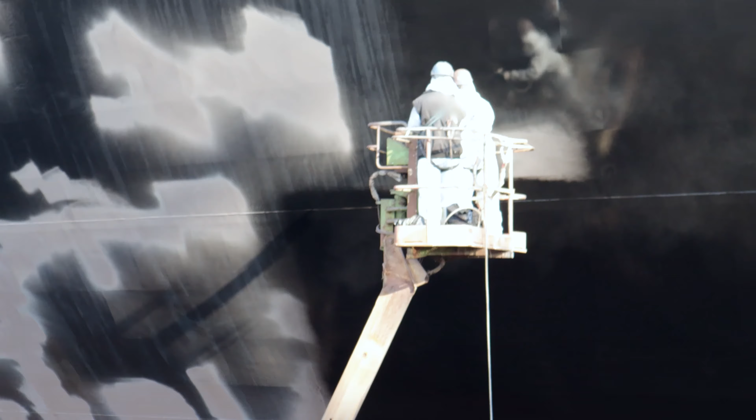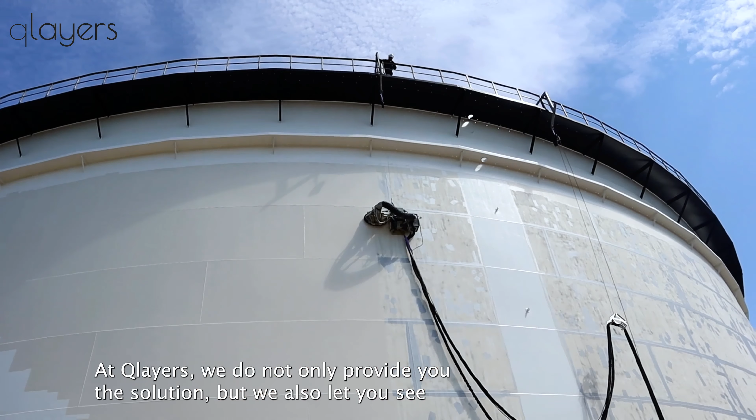Doing the paint job, you might have felt the pressure before. To reduce waste, to meet environmental regulation, to comply with stricter standards and procedures, and every year there are new goals to be met and the market is only getting more competitive. And how can you choose the best application to meet all of these requirements? At Qlayers, we do not only provide you the solution, but we also let you see the real impact of your green effort while using our coating robots.

Hi, my name is Alessandro and I'm excited to introduce the Qlayers Sustainability Dashboard, a system designed to predict and track the environmental impact of your coating projects with some important KPIs. So let's see an example.

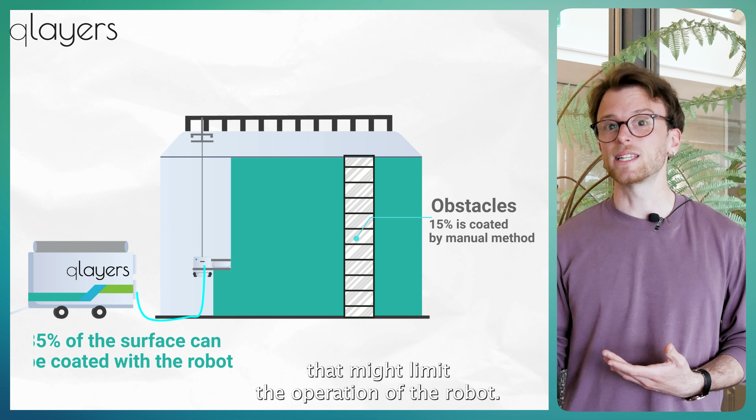Imagine you're working on a project with 10 tanks. Each one of them is at least 30 meters in diameter and around 20 meters in height. So this makes for a total surface of around 22,000 square meters. On the surface there might be some obstacles that might limit the operation of the robot. So let's assume that around 85% of the entire surface can be covered by the robot application, while the remaining 15% can be done with the traditional painting method.

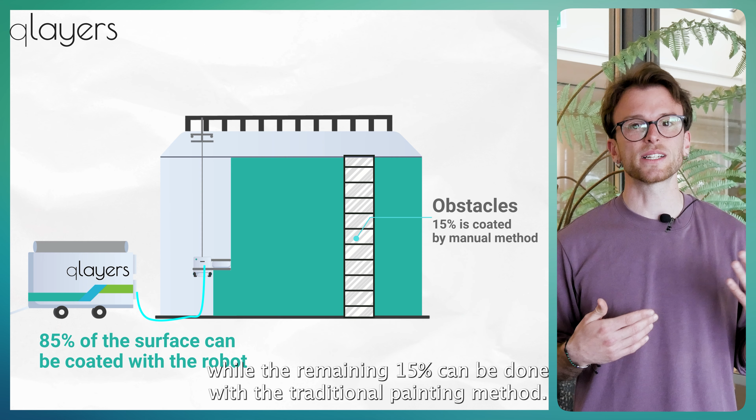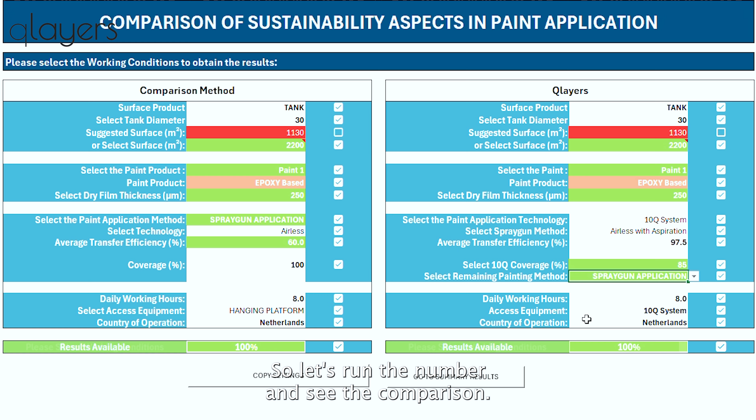For the comparison, we are comparing our robotic paint application with a traditional spray gun application. We are using different variables in our scenario, so feel free to pause the video and see through all the results in the scenarios. So let's run the numbers and see the comparison.

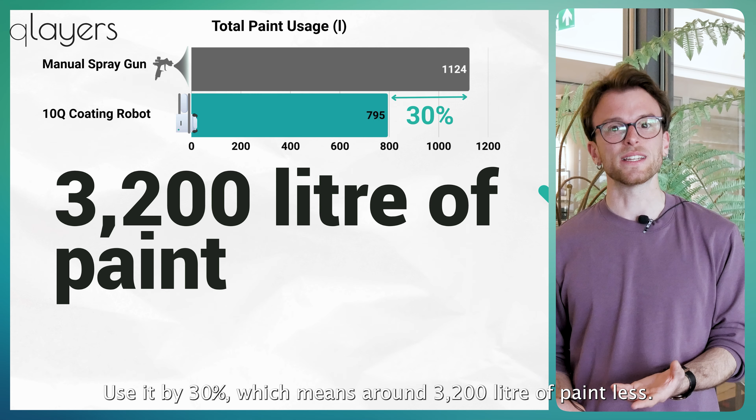First, you can see that our product can decrease the amount of paint used by 30%, which means around 3,200 liters of paint less. Less paint means reduced cost, but also reduced resources for the production, less transportation, and of course, less waste. Plus, our 2K pump system eliminates the need for pre-mixed paint, cutting down even more the amount of waste and unnecessary processes.

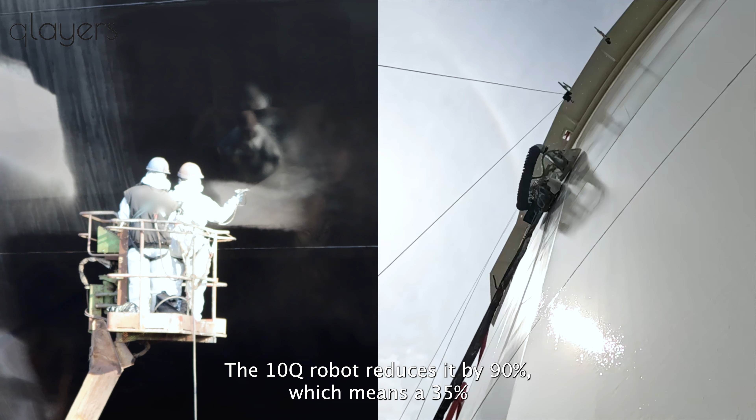Next, we are talking about overspray. The 10Q robot reduces it by 90%, which means a 35% reduction in environmental impact on different categories. When it comes to greenhouse gas emissions, we are seeing a reduction anywhere from 5 to 30%. Meaning around 1 ton of CO2 equivalent, a step in the right direction towards your sustainability goals.

And it's not just about the environment. In this scenario, we are also enhancing worker safety by reducing the working hours at heights by 50 to 60% and reducing the direct contact between the workers and the hazardous paint compounds. And let's not forget about durability. With a precise and consistent application, you'll see an increased lifespan of your coating, meaning fewer touch-ups and a lower long-term maintenance cost.

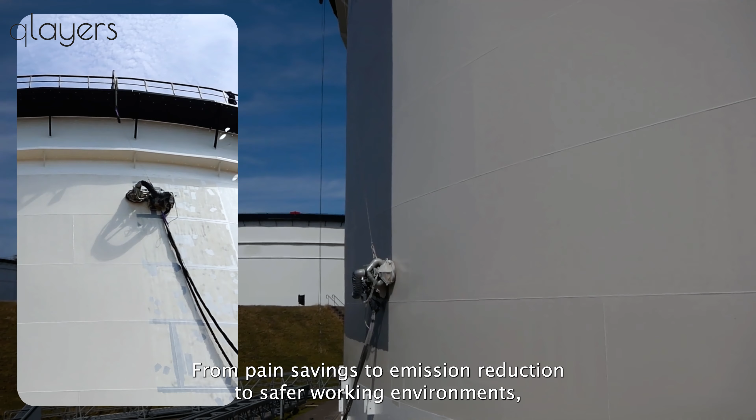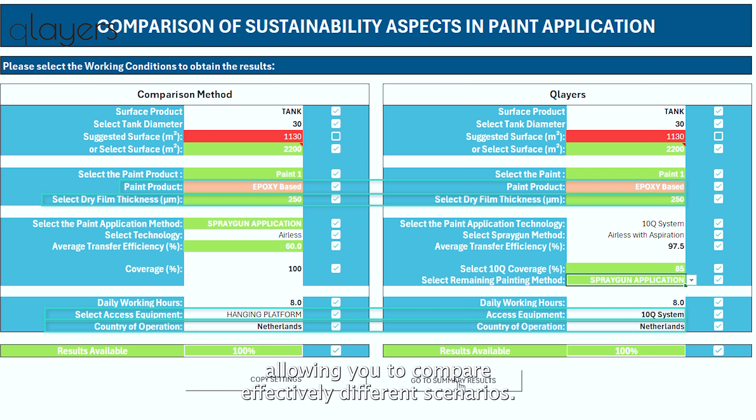From paint savings to emission reduction to safer working environments, the Sustainability Dashboard puts all of your sustainability metrics at your fingertips. At Qlayers, it's not just about getting the job done, it's about getting it done right, for your people, for the planet, and for your business. The dashboard also supports the use of different features, such as the paint use, the DFT, the access method, and the country of operation, allowing you to compare effectively different scenarios.